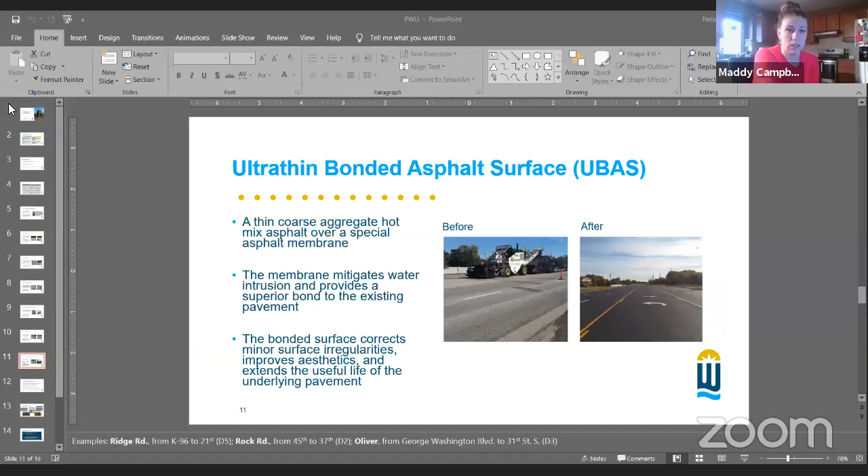Which one of you guys wants to kick off the Public Works presentation? Gary, your call. Do you want to go first or do you want me? All right, you go ahead, Ben. Okay, that's fine. I'll start off, and if you'd like, I have a PowerPoint I can share. Yeah, I will give you control. I'm gonna go ahead and make you the host so you can share your screen. Perfect. And we'll go to speaker view. Take it away. Can you guys see that on your screen? Yep. Hold on just a second and I'll make this bigger for us. You guys can see that? Yep, I can see it. Lonnie, good? Great.

Well, so what I'll do is cover kind of an overview of our department, Public Works Utilities, what we do, just kind of a high level look at our department, and then dive down a little bit more into a couple of services that we get asked a lot of questions about, street sweeping and snow removal. And we'll transition at the end to give an update on our new water treatment plant that's under construction.

So just to begin, what does Public Works do? We're a very large department. We have 763 positions, an annual operating budget of $271 million. We also have a sizable portion of the CIP. I believe what falls under Public Works is about $1.8 billion over 10 years, much of which is administered by Gary, and I'm sure he'll cover a lot of the projects that are ongoing that his engineering section manages.

So we're a sizable department, but at the end of the day, really what we do is manage the city's infrastructure. The way we like to think of it is that we have individual asset groups or infrastructure groups, if you will, that make up our portfolio. We have 4 asset groups on what we call our public works side, which is basically all the non-utility stuff. And then we have 4 asset groups that are part of our utilities. I'll start with an overview of Public Works.

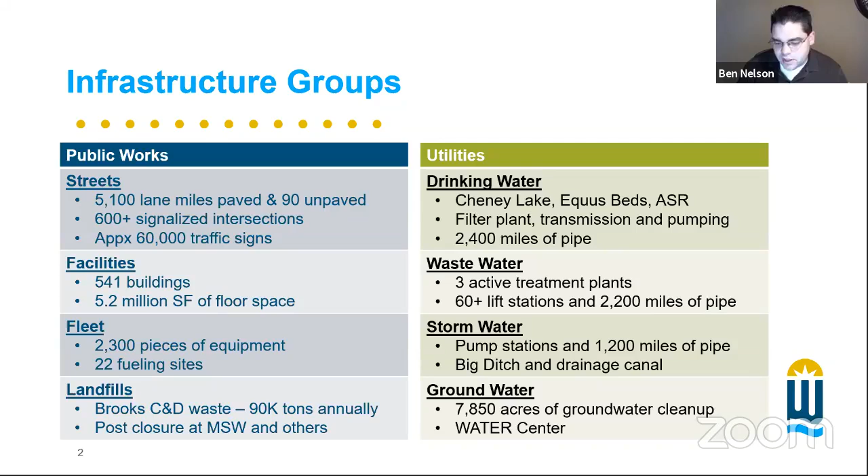Finally, the utility section also has a groundwater remediation group. There's almost 8,000 acres of area here in the city of Wichita that has polluted groundwater where private wells for drinking water are not allowed. That is gradually being cleaned up over the next 30 to 40 years. All that ends up going to the water center at Pawnee and Broadway for treatment and eventual discharge back into the environment. So that's what we do. We're a large department. We handle a lot of different things, but at the end of the day, really, we're the city's infrastructure managers.

I want to highlight street sweeping and snow removal. We get a lot of questions about those. Street sweeping is actually a requirement under something we call our MS4 permit. That's a municipal separate storm sewer permit that is for discharge from our storm sewers. There's a best management practice that requires us to do some level of street sweeping to keep all of that debris from getting into the storm sewers. We also know there's some aesthetics associated with it to have cleaner streets.

Generally, we clean our residential streets on first shift. There's less on-street parking during that time, and there's a lower amount of disruption caused by the noise of the street sweepers. And so subsequently, that allows us to target our arterial streets on second and third shift when those are a little less traveled. When we're fully staffed, we're able to generally get to residential areas 1 to 2 times a year, depending on how much debris accumulates in different neighborhoods. We target our arterials to get swept 4 times a year, and our central business district, we try to do a couple of times a week. That's when we're fully staffed.

Right now, we've got a hiring freeze, as a lot of people know, so we're quite a bit lower than what we're normally able to do, but we're hopeful that once there's an economic turnaround, we're able to get back to our normal street sweeping cycles. The last thing I'd highlight is that the debris that we take off the streets, we take up to our landfill and we screen it, and we're able to use most of that as cover material at the landfill. Over the last 5 years, that saved us more than $3 million. So we're effectively able to reuse what we take up off the streets.

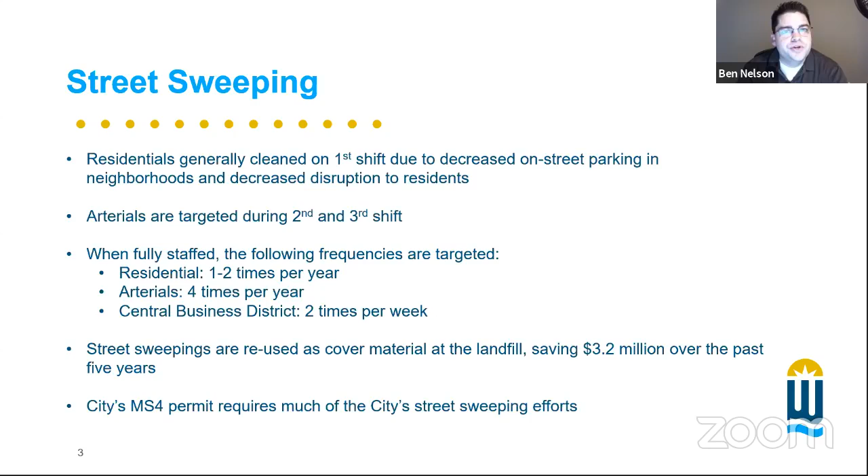Snow removal gets a lot of attention this time of year. Hopefully it's a lighter year for us, but we're ready in case it's not. I'd like to highlight the personnel, the routes, the material, and the equipment we use just in general for response. We track a lot of our winter storm response based on the National Weather Service. It regularly updates every 4 or 5 hours forecasts for the subsequent maybe 4 or 5 days. And so we're able to see what the National Weather Service is tracking on a regular basis in terms of any sort of expected wintry precipitation.

So sleet, snow, ice, or freezing rain. And so we use those forecasts to kind of craft our response. In terms of our snow removal responsibilities, generally we're in charge of the surface streets. Kansas Department of Transportation handles the freeways.

When we have one of these storms, we have priority on the 1,500 lane miles of arterial city streets. And then as a secondary priority, we also treat 300 lane miles of secondary routes and school routes that lead up to educational facilities.

When we have one of these storms, over the course of a 24-hour period, we have about 150 personnel who are operating the equipment, the dump trucks, the loaders at each of our substations. We also have about 15 to 25 other people we have on standby in case some of the regular responders are out on leave. So we have some contingency in case something happens.

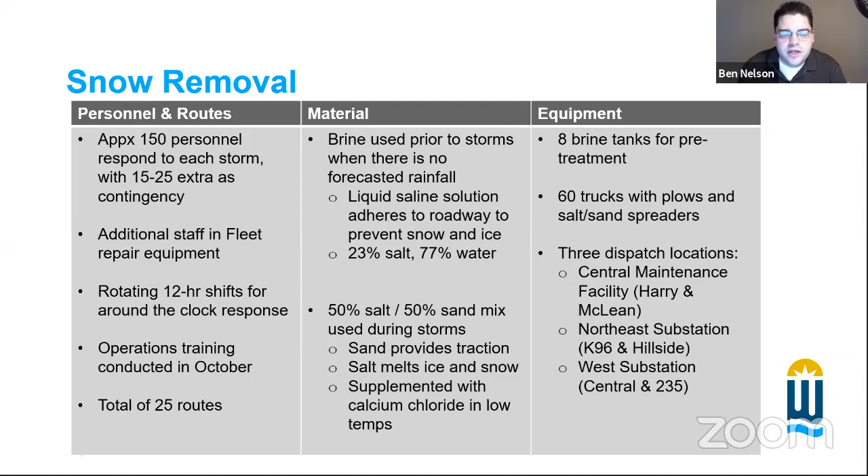Finally, in terms of equipment for snow and ice, I believe we have 8 brine tanks that we can use for that optional pre-treatment, which can go days in advance of a storm. When we get into the storm, we have 60 trucks with the plows that also have the material spreaders on the back. And we dispatch out of 3 locations, one just south of downtown, one in Northeast Wichita, and one out on our west side. So that's kind of an overview of snow removal. We kind of craft our response to National Weather Service forecasts, but in general, that's our approach.

We'll talk real briefly about our pavement preservation program. I apologize, I meant to mention this. Each year we do an annual set of repairs on our streets. Our city council just passed the next pavement preservation program for 2021. They passed it on October 20th, $11.5 million that we've got slated, and we'll start bidding that out soon. So we'll highlight some of the treatment that we do.

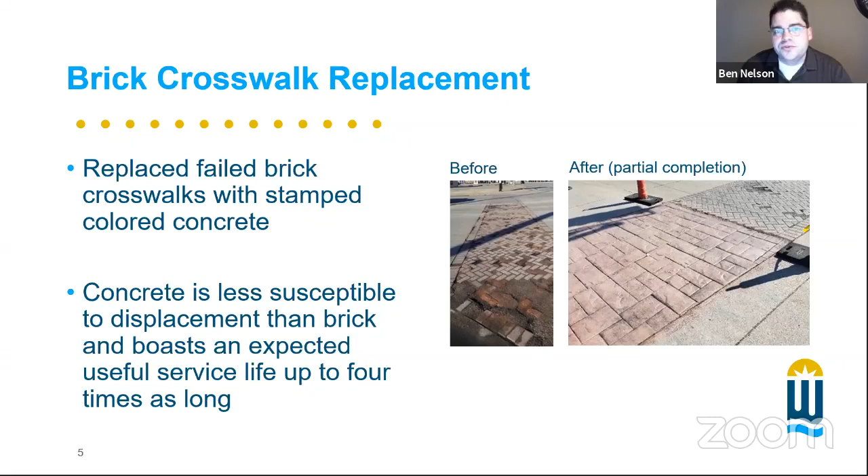Brick crosswalk replacements. We got a lot of bricks that come out of these crosswalks all throughout the city. They've been a maintenance challenge for years, so we're gradually replacing those with stamped concrete. We also do concrete repairs, full depth removal, and then replacement of failed concrete sections. And this addresses a number of different issues that we see on some of our older concrete streets.

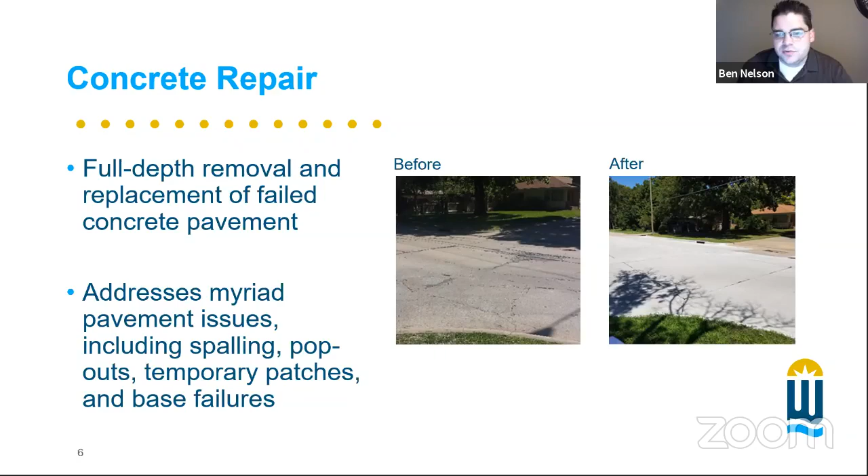We also have a set of miscellaneous repairs. We call them localized repairs, where streets a lot of times are in pretty good condition, but there's some problem with a curb or part of the gutter or some other portion of the street. And so we do a full repair on those, and the rest of the street's usually in good condition.

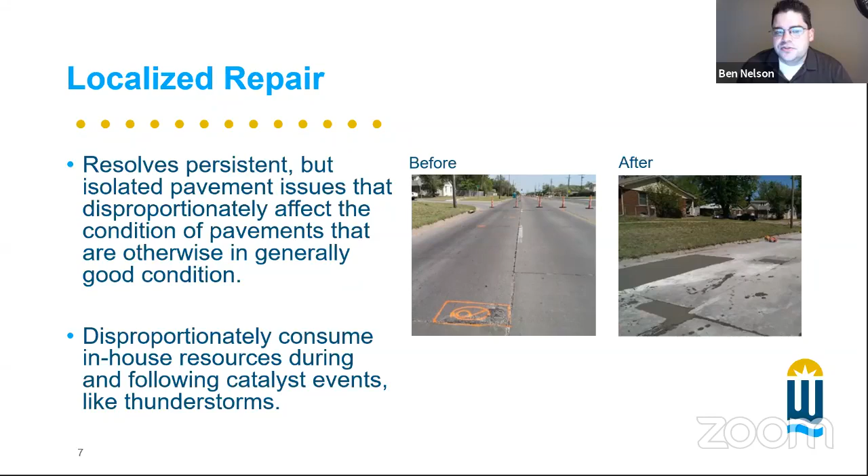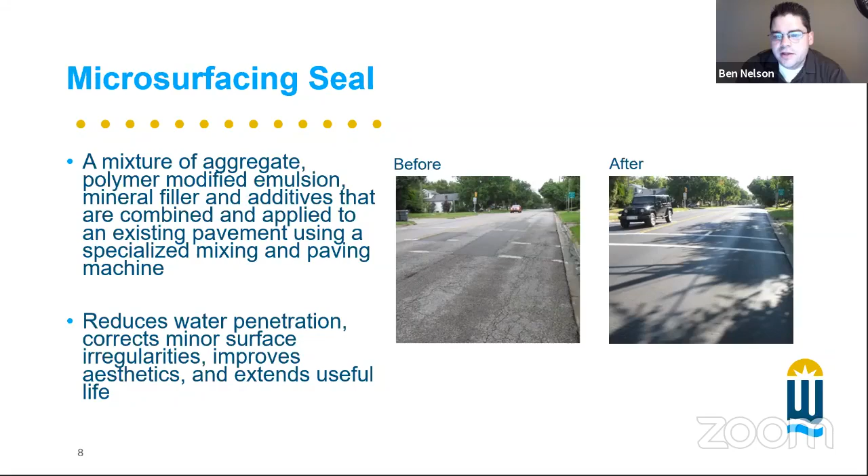Microsurfacing, it's a seal that we put down on the street. It's a mix of polymer modified emulsion and a mineral filler. And ultimately what this does is it keeps water out of the street. It fixes some of the surface irregularities that people see and extends the life of the pavement.

We get a lot of benefit from this next one, crack seal, where we get a rubberized asphalt and fill in cracks all throughout a street, where a lot of times the street's in pretty good shape otherwise. What this does is it helps, again, minimize water intrusion, and it reinforces the adjacent pavement. So we get a lot of preservation of our streets with this crack seal work. We're able to do a lot of it for pretty inexpensive cost.

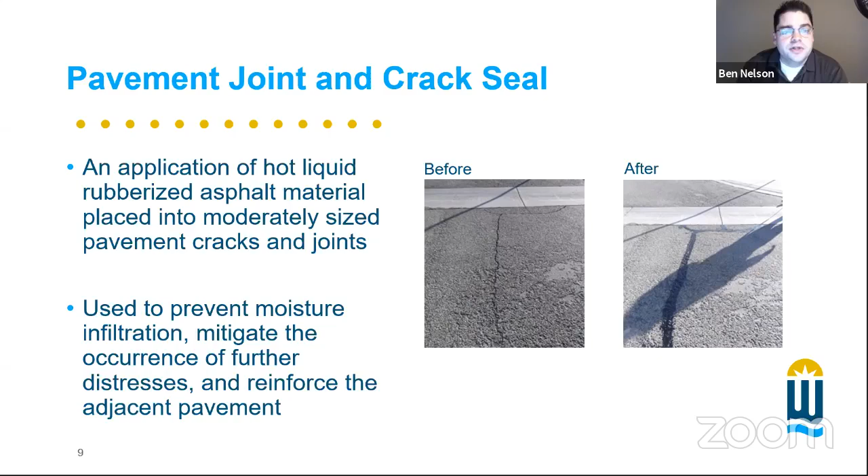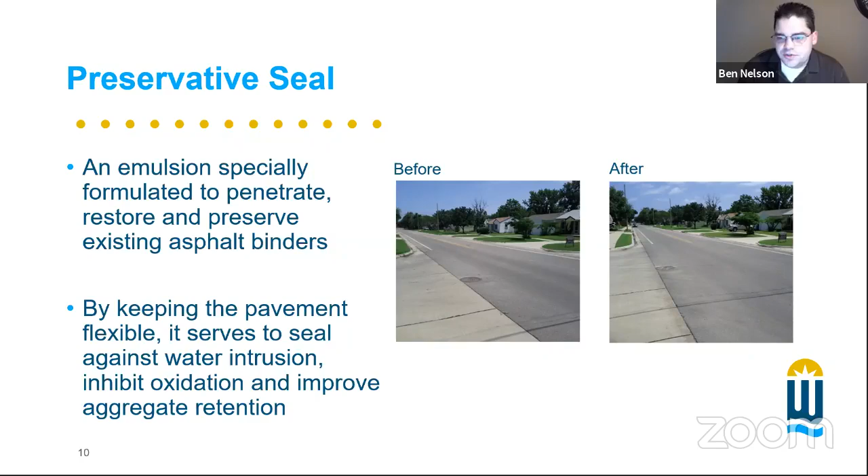We do a preservative seal in different areas. This is another seal coat that helps prevent water from getting into the street and improves the retention of the aggregate, the existing aggregate on the street.

Final one I'd mention is an ultra thin bonded asphalt surface. This has been a very popular one for us in different areas where it's a very thin aggregate with an asphalt membrane that gets applied on top of the street. And you can see a before and after picture there. And so this also corrects some of the surface irregularities and aesthetically becomes very pleasing afterwards. And a lot of times, a lot of people confuse it for a new street. So these have been very helpful seal coats for us and preservative seals.

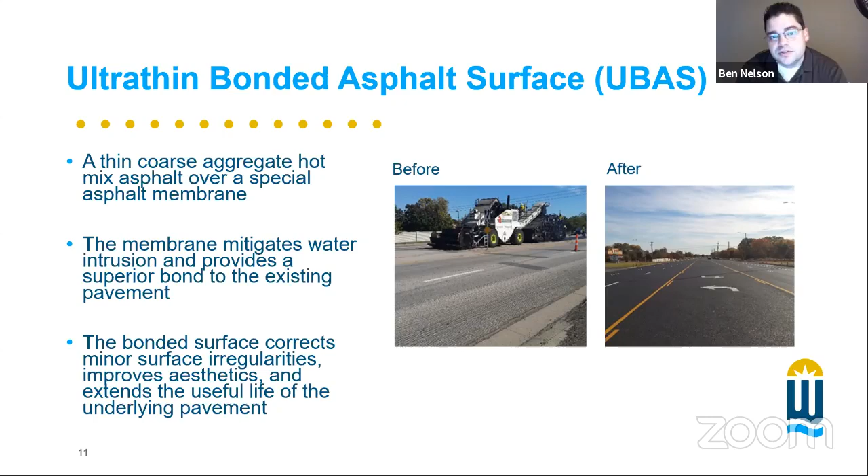Finally, I'll transition from streets to water treatment. I wanted to give an update on where we're at with our new water treatment plant. So our existing system has a lime softening and filtration plant. It's near downtown. Parts of it were built back in 1939 and 1940. So portions of it are 80 years old, and it's had some failures along the way, been well publicized, so I won't get into a lot of those, but certainly it's time to replace it. It's our single treatment plant that serves 500,000 people.

So we've got a new construction project ongoing right now just across the street from the zoo out in West Wichita, building 120 million gallon a day treatment capacity for that new facility. And it's fully redundant, meaning any asset can fail and go out of service, and we're still able to deliver 120 million gallons a day through the facility. It, like our current plant, is a lime softening and traditional filtration plant.

We're doing this through a progressive design build project delivery, where we have an integrated team that does the engineering design as well as the construction. And we have a joint venture, Burns and McDonnell and Alberici Construction, that comprise Wichita Water Partners. That's our design build team. They have, I believe it's 14 other firms that are associated with them. So it's a very large team that we're working with.

And I didn't list it here, but we also have an owner's representative. They help us with plan reviews and a lot of the technical aspects of managing some of the work that we have and the clearance with KDHE and whatnot. So we have Garver Engineering as our owner's rep.

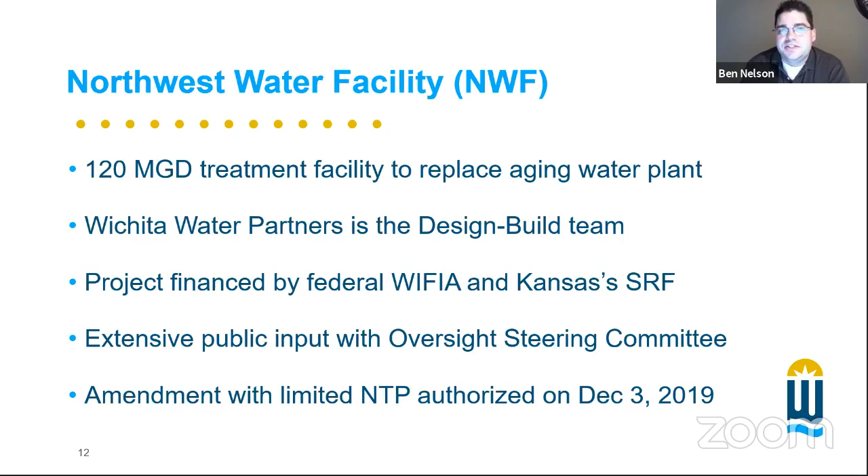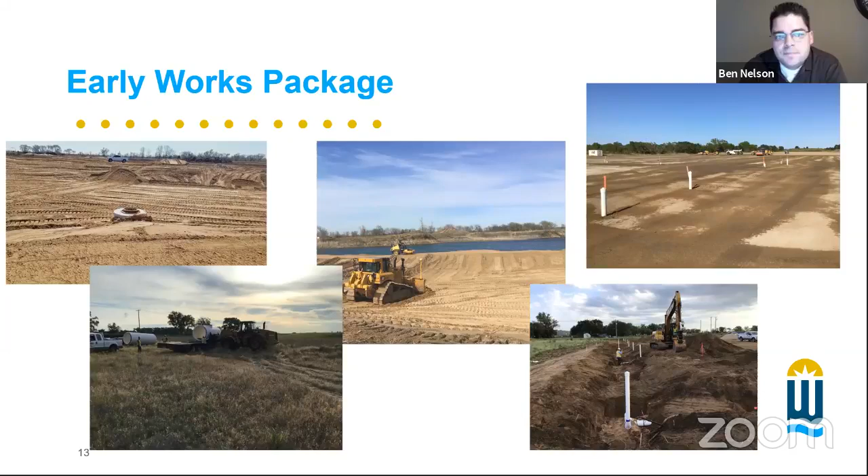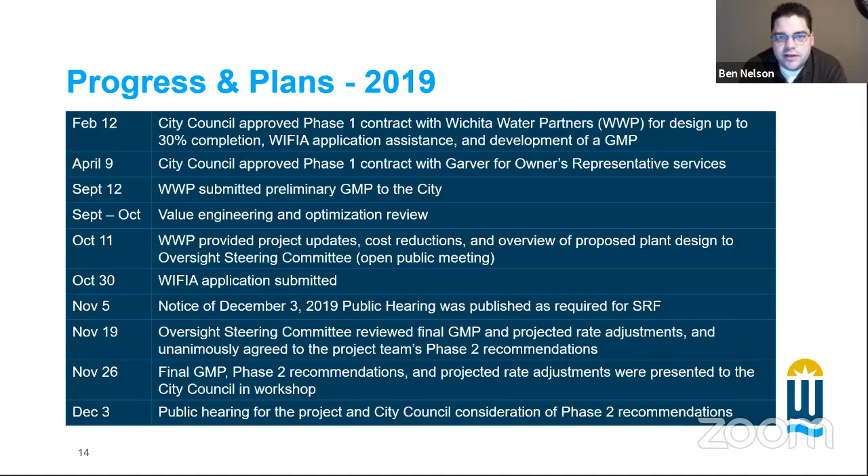Since 2019, we've taken a number of steps. Again, council approved it in February. Got a guaranteed maximum price from the design build team last September. It was too high for us to want to move forward with. So we spent 2 months going through a value engineering review and optimizing the treatment plant. Got the price for the plant down to where it was $14 million under budget. So we took that last October, submitted our WIFIA application, went through the steering committee, and ultimately the council approved the final GMP and that limited notice to proceed last December.

In terms of what we did this year, we've acquired land just down on 13th Street, across the street from Sedgwick County Park, where we need to put in a power substation. Evergy needs to build a standalone substation to serve this one facility. The site location allows us to keep from having to put in any overhead power lines, so that's very helpful for us. We finalized the credit agreement with WIFIA and secured an interest rate of 1.17%, which is probably one of the lowest interest rates we've ever had in terms of a loan. So that's been very helpful.

We acquired an additional site over near Zoo Boulevard that allows us to have an optimum space layout. We actually had a groundbreaking ceremony here about 3 weeks ago where we had KDHE, EPA, and other officials have more of the ceremonial groundbreaking. And most importantly, on November 3rd, here this past week, the City Council, while also approving the first state revolving loan fund, issued the full notice to proceed. So at this point, we are off to the races, getting everything constructed.

It's going to be a busy next 3 years or so, 4 years. And we're expecting to stay on target with our schedule, which right now means that the new plant would be substantially complete September of 2024, at which point we'll have a fully redundant facility that provides higher water quality than KDHE standards. So we're very excited about it. So hopefully I didn't talk too long. Overview of public works, street services, as well as the new water plant. And I'd be happy to answer any questions.

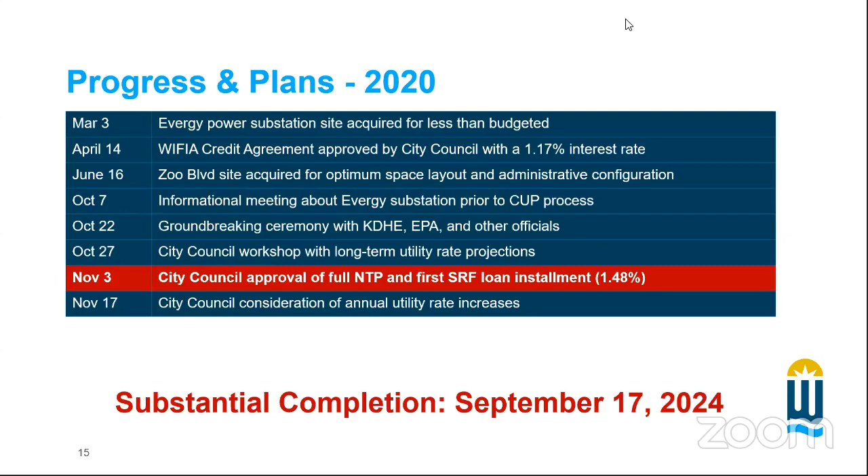I have a few questions under the fleet. Yeah. I read where transit leases their tires. Is that correct? I don't know. So we do not manage the transit fleet out of Public Works. I think I've heard the same, but you'd probably want to check with Mike Tan, our transit director, to know for sure. The fueling stations, are they just for government vehicles or do they include retail outlets? Only our city vehicles, as well as our MABCD vehicles that are owned by the county. Those are the only ones that can use it.

How do we determine when to replace vehicles? We have a decision support tool, which is an analytics model that helps guide what our replacement intervals should be for each of our asset classes. And what it looks at is the annual maintenance and repair costs, along with the amount of downtime that's associated with each type of equipment as they age through their life cycle. And so it uses prescriptive analytics basically to assign a replacement interval, say 10 years or 11 years or 14 years, based on the type of asset that it is.

And then that's how we budget how much to have ready to go based on each asset class, like patrol vehicles, for example, or fire apparatus. And then individual replacement decisions are made. We use a scorecard approach that's been provided by the American Public Works Association, where we rate each asset based on a number of factors, like how much downtime is it experiencing, are the maintenance and repair costs at a certain level where it makes more sense economically to replace it. So we have a decision support tool that allows us to budget for all 2,300 pieces of equipment. But when we get down to the individual replacement of the one asset, we look at that particular asset's performance before making that decision.

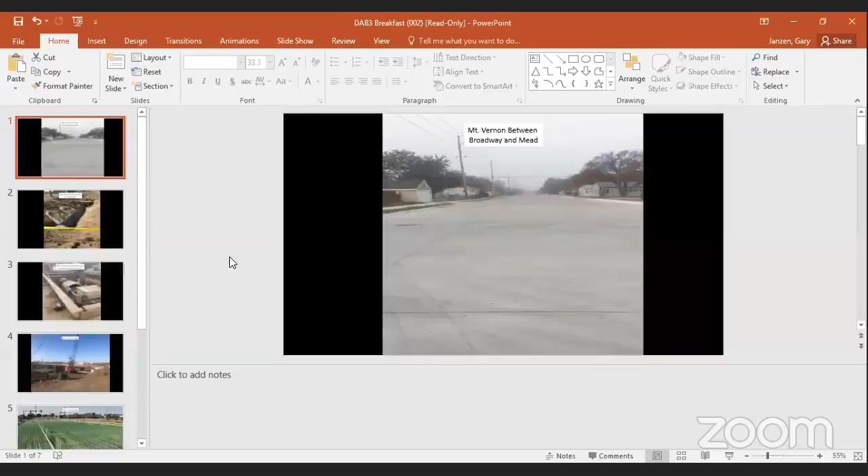There we go. I see your screen. Lonnie, do you see it? Yeah. So hopefully Lonnie does. If you do, I would assume. Yes. I'll assume that as well. Okay.

So I had a little bit more detailed information on another PowerPoint that got stuck on another laptop. So I've got a loaner. So I scrambled to put a few things together this morning. So not the best quality on a few pictures, but I had to get a few things from somewhere else.

Mostly I wanted to talk about where we're currently at on a couple of capital projects, and specifically Mount Vernon from Broadway to Southeast Boulevard. I was going to talk about the Harry Street Bridge. We're working on design for an event center at Watson Park I'll briefly touch on, and then I want to talk about a big sewer project we have coming near I-135 South in Pawnee. So I'll start with Mount Vernon.

This project has been under construction for some time now, with the goal to widen Mount Vernon to 3 lanes from Broadway to Southeast Boulevard. And we're making progress, as you can see here. We've worked this basically in 3 block sections. There's significant drainage improvements here, pretty deep work, a lot of underground work that limits our ability to keep the road open like we normally would try to. So I think it's worked fairly well.

We do a lot in advance of these projects, working with the neighborhoods. And especially when you've got things like Gardner Elementary down here, of trying to work with the school in advance on what traffic patterns might look like, how access will work. We've all been battling through the COVID, but I will tell you in some areas of town where we've got construction adjacent to schools, having the schools not in session was not necessarily a bad thing for us. But this project's moving along.

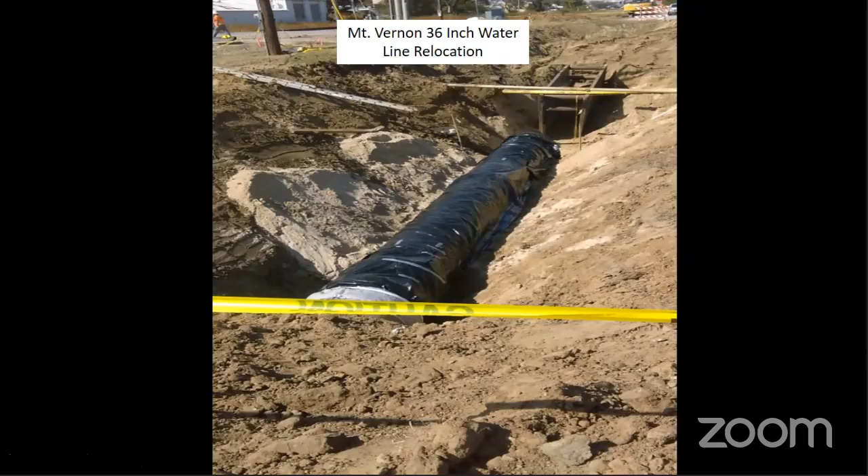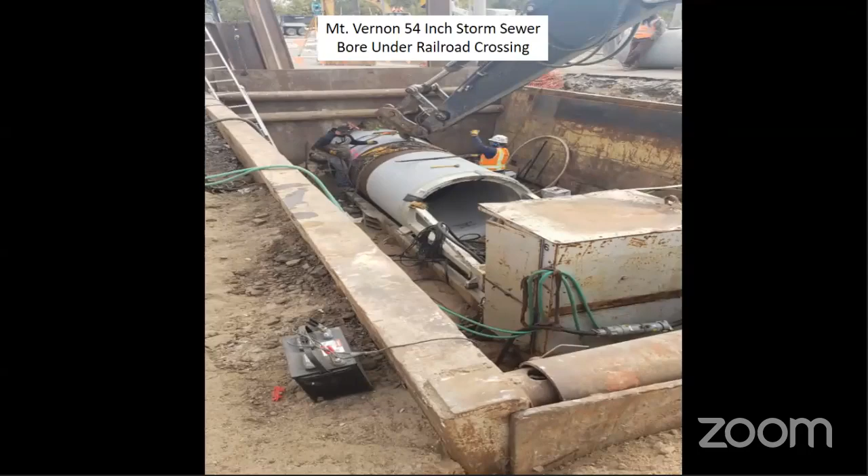We've had quite a bit of significant work at Southeast Boulevard utility wise. We have an existing 36-inch diameter water line that's the primary water source for Southeast Wichita and Derby that had to be relocated so that we could provide some drainage improvements. So we've been doing that work for a while. It's had the intersection closed. This is a 54-inch diameter storm sewer that's being bored underneath the railroad as required by their specifications. Pretty complex work. It just takes some time to get through it. That's what's had most of that area closed off for a while.

We do plan to have Southeast Boulevard back open to through traffic by Thanksgiving. The turns onto Mount Vernon will still be limited and mostly prohibited, but we'll be winding down on quite a bit of this work by the end of the month. That project itself on Mount Vernon is expected to be fully completed by next spring. As always, this time of year, never knowing what the Kansas weather is going to do. Ben talked about that quite a bit with our snow and ice operations. We can hopefully keep going.

You know, if you look at the forecast for the next couple of weeks, it looks really good. But we'll see what happens with winter, because unfortunately we can come to a point in time where construction operations really slow down. One thing nice about concrete pavement, which this is, we can work through a lot more adverse weather than we would otherwise with asphalt streets.

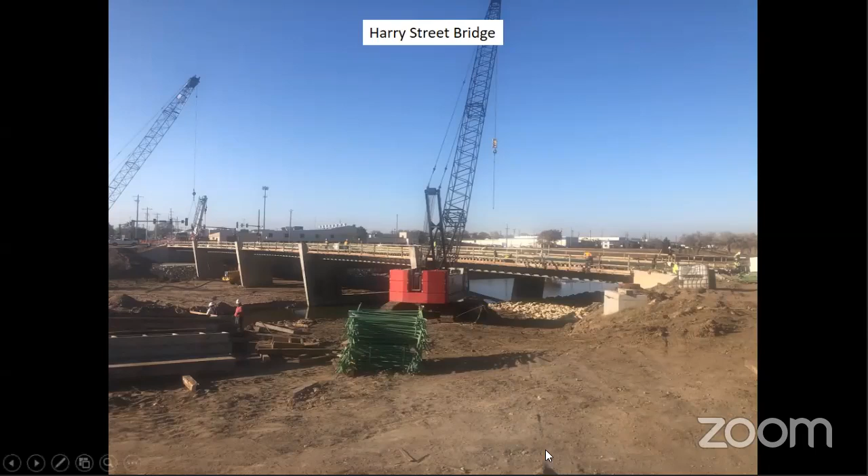Harry Street Bridge, we had a little bit of a delay on this end of the project, being the east end, working through some permitting issues with the Kansas Department of Wildlife, Parks and Tourism. These are issues we work through quite often, and we need to be cognizant of working in the river environment. If we get into spawning season for certain species of fish, it limits what we can do. And unfortunately, we did hit a timing issue here where we had to kind of stop work on this end, but things are moving forward now.

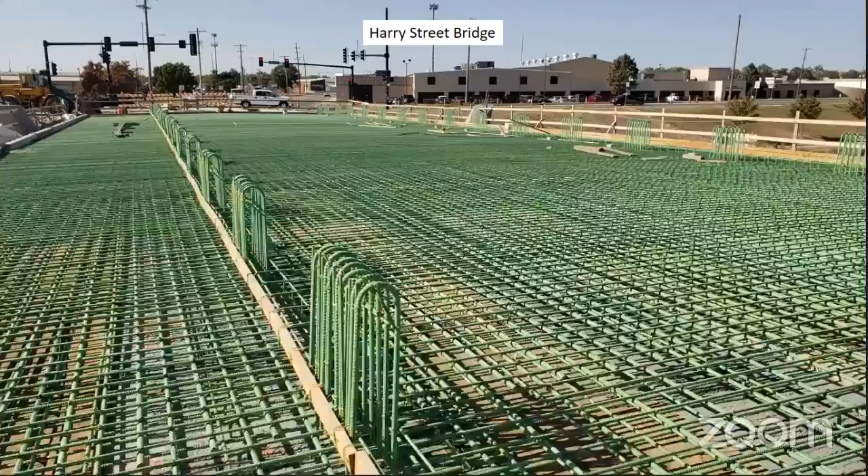And we are just about ready. You can see all the reinforcing steel here on this bridge deck. We're about ready to pour this deck. This part of it, with getting all the concrete in here, should be done by Thanksgiving. Hopefully, if everything goes right, we'll have the bridge open to traffic by the end of the year, but it may push into January. This is going to depend on the weather too. So I might go back.

These bridge piers, if you can kind of see where there's a vertical part of this bridge pier, we do have some pretty cool aesthetic elements that will be going on this bridge, some lighted spires. We've got an artist as part of this design team, and we spent some time working through the design council, along with input from Councilmember Clendenin. I think it's going to look really cool when it's done, and add really nice artistic elements for the area and the neighborhood, especially at night with the lighting on it. So we're excited to get to that point and see how that looks.

We also have fewer piers in the river than there were with the old bridge, which is always good for a lot of reasons in maintaining the river and even for future maintenance of the bridge itself.

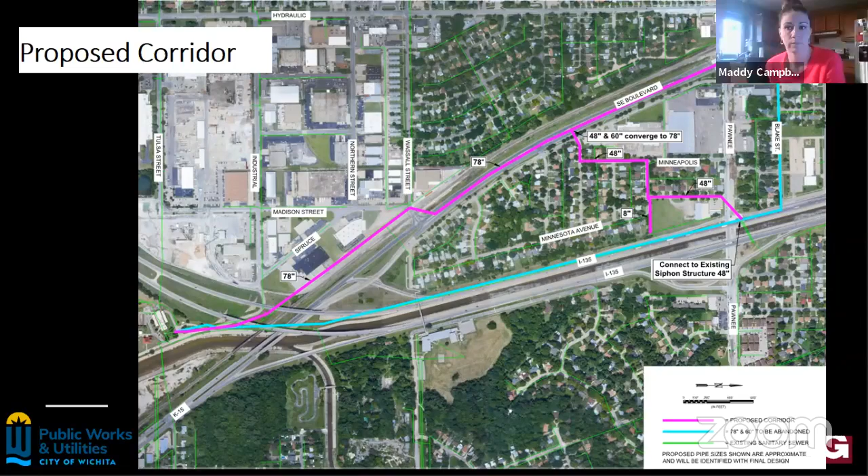Yeah, I think you touched on a lot of the significant District 3 projects that people are eager to know more about, excited to see. So Lonnie, you got anything for us? I don't have any questions from Facebook yet. What are the new water pipes made out of?

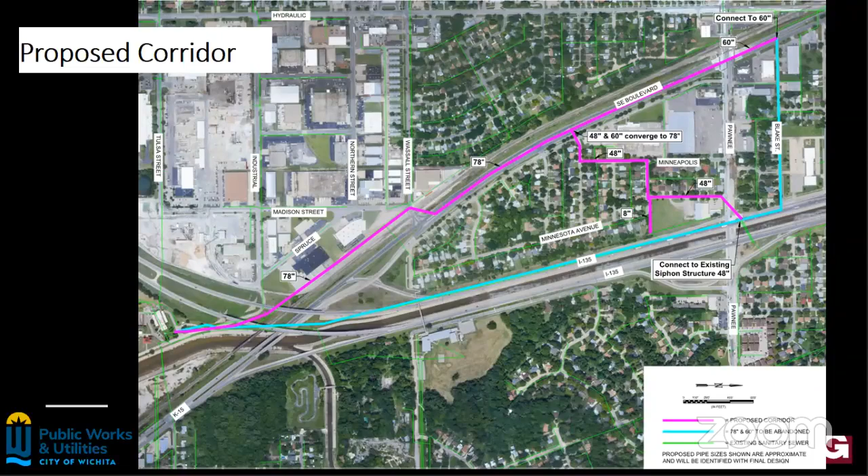When you get to be a larger size pipe, and especially if we're going to have any type of required joint system where we need to restrain joints, where we've got fittings, where we've got bends in the pipe, there's a lot that goes into evaluating pipe type and joint systems with that. And we work with our engineers specifically and the pipe suppliers to determine the best material, because a lot of times we need to restrain those joints. There's a lot of thrust on a 36-inch diameter pressure pipe anytime you put a bend in it, right? And so we've got to restrain, we've got to resist that thrust. We've got to have a restraining system that will keep that pipe in place long term. So all that plays together. And I know that's not the most specific answer, but we continue to look at emerging technologies and pipe materials.

We hear from vendors quite often. We also utilize polyethylene pipe when we can, because it's got a more simplified joint system, but especially when we get into the bigger pipes. On the smaller pipes, we primarily look at PVC pipe on sewer and water both. It's shown that it's durable. The joint systems work well. It's easy installation. It helps save costs long term. So a lot of what we have in the ground on our smaller pipe is almost exclusively PVC pipe.

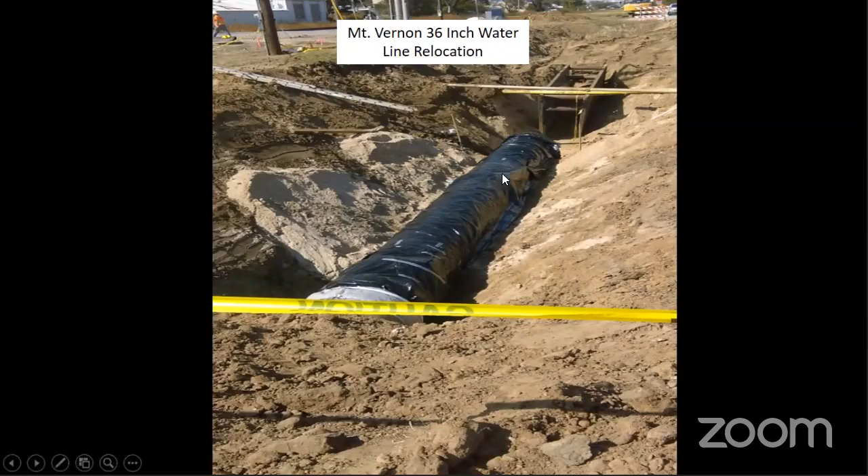That's all I had, Maddy. Okay. Lonnie, you got all your answers? Yes, I'm pleased to be able to take advantage of this opportunity. It helps me. Thank you for joining us. Lonnie, do you attend the WIN and City of Wichita meeting? What meeting? The Wichita Independent Neighborhood and City of Wichita meeting in November. Yes. Okay, so you might get a repeat on some of this stuff when we have them attend that meeting, but I'm guessing you'll have more questions by then anyway. Lonnie, you're going to get the upgrade. It'll be Aaron Henning and Don Henry instead of me. I need to hear things more than once.